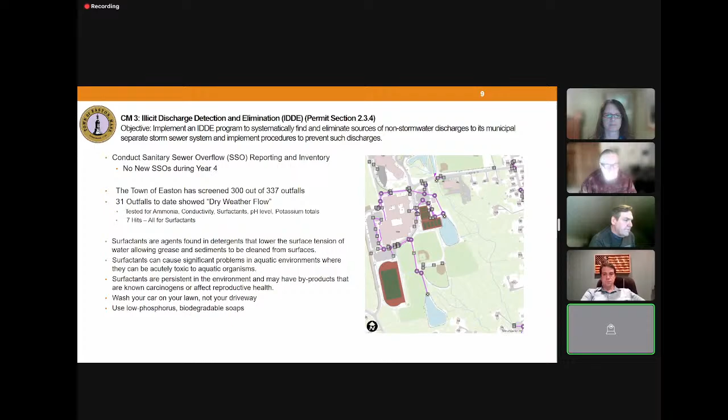In general, what have we done in the past year? In addition to everything I just talked about, we send out all the public information, updated our bylaws per the requirement, sweep all our streets twice a year, and inspect as many catch basins as we can to remove sediment. This year we inspected 679 catch basins and removed over 70 cubic yards of material, dirt, grit, anything contaminated, which we've removed and stored. When we have enough material, we'll properly dispose of it.

These last five items are really a testament to Jen and how hard she works here. She and her staff have reviewed 71 site plans, completed 404 site inspections, issued 13 enforceable actions, received 52 as-builts, and she's reviewed 5 SWPPPs—which if it sounds impressive, it is. That's a lot of work, and I don't know if she gets the credit she deserves for everything that she does.

So, Jen, if you want to take a victory lap on that one. That was very nice, thank you.

At the end of this year and next year, we will continue distributing educational messages to our targeted audiences. We need to issue one more message to industrial and commercial business owners. Unfortunately, because of COVID, my ability to get out and talk to people had to be delayed. I want to get in front of a couple of sites in town, and I'm working with Stephanie to go to some of her meetings and give a presentation about what business owners can do if they own a commercial or industrial site. Simple things like making sure dumpsters are closed before a rainstorm, no trash in the catch basins, and making sure landscapers aren't dumping debris in drainage swales. Little things like this really add up over time.

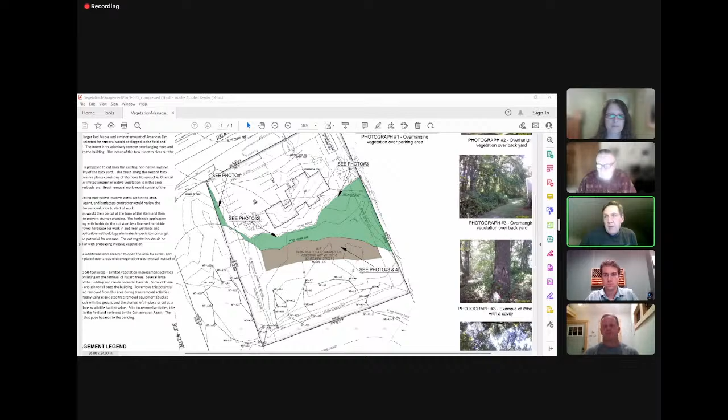Okay, so seeing none, we'll continue to the 21st. Is that correct? Yes.

You agreeable to that, Brad? Yes, for sure. Okay, make a motion to continue 95 Belmont Street to November 21st. Carol, second. Roll call vote.

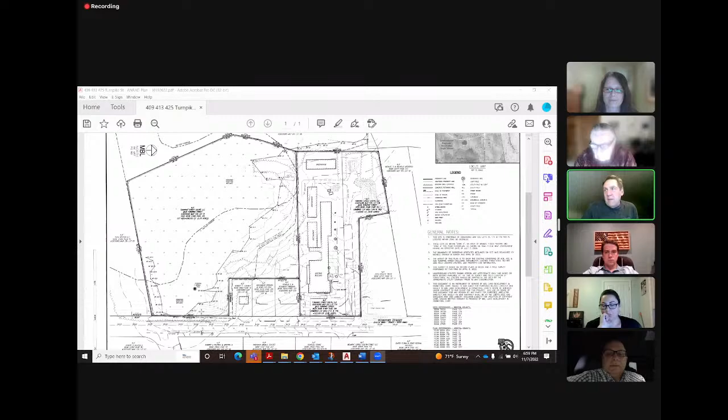Any public comment for 413, 415, and 409, 413, and 425 Turnpike?

Okay, so seeing none, we will continue to November 21st. Sounds good. Okay, so I'll make a motion to continue 409, 413, 425 Turnpike to November 21st.

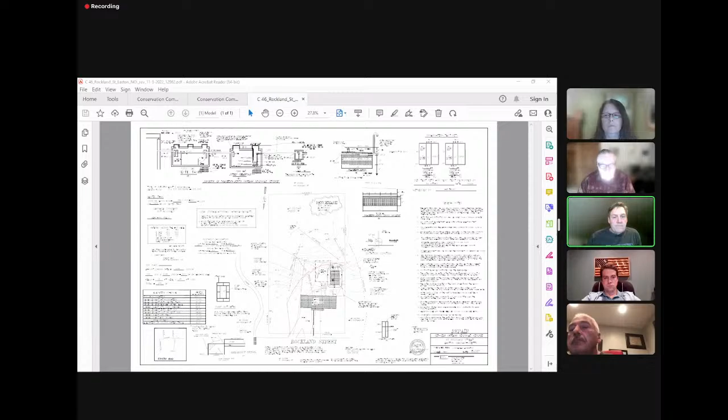Okay, we should have them. We can see them on the screen, yeah. Okay, can you see them now? Does that help, Jennifer? Yes. Could tell by the squinting. I have 3 pairs of glasses, these are only for the UV light, the blue light, they're not for distance or reading. Okay, there you go, Bill.

There's your plan, okay, so there it is. The septic system is pretty much in the only area it can fit on the property. I tried to maximize the distance from all the wetland type stuff there.

When I submitted, the flagging, I think Jennifer looked at it, but the flagging was done by someone else, I don't know who it was. The homeowner at the time was looking to sell his property, but the flags are all up, and so I just located them. I had a little mess-up on a couple of the locations, but this plan fixes them from the first submission that Jennifer had.

I added the stream, the required setbacks. She said something about a potential vernal pool, so I added where that was and showed all the setbacks. That's just about 100 feet from the leaching area. The leaching area is about 55 feet from the closest vegetated wetland. I added the 100 foot off the stream. The leaching area falls about right in the middle between the 100 and 200, it's about 150 feet away from the stream. So any other questions or comments? Glad to address them.

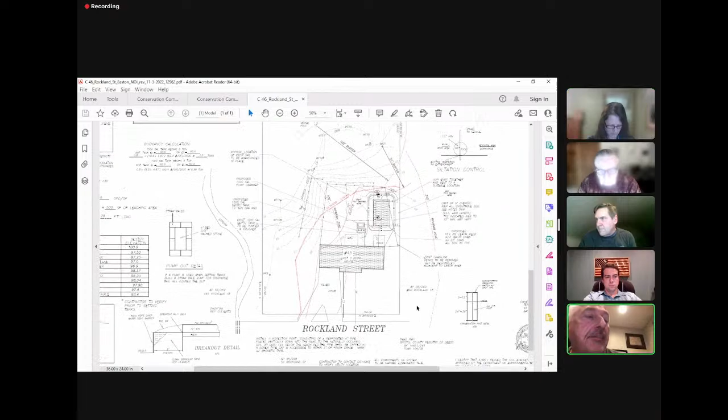Okay, and what about the other missing information that's listed in the staff report? I believe I uploaded everything. You had asked for a couple of things, what was up in your report? A couple of other things, and I believe I uploaded everything.

The supplemental form isn't identifying all the resource areas on the property. There's something on the supplemental form that says you're exempt under the bylaw, but this isn't exempt under anything. Use the correct form and resubmit the revision, please. Then a written description of how the project meets the performance standards, the FIRM, and the natural heritage maps.

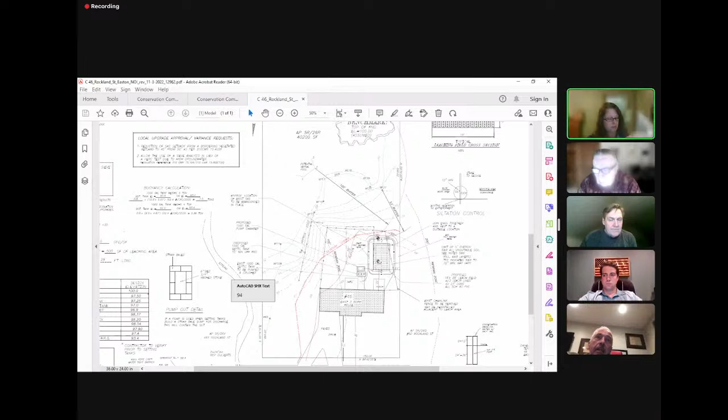I know, some of those things, quite a list, so without, and it was done in September. If you're telling me that everything has been submitted, okay, I'll have to look it up, though, I won't be able to do that right now. I understand, I just wanted to kind of get it rolling. If there was anything else you needed, I can address it and have everything together from the plan, at least for the next meeting, and I'll make sure you have all that information you asked for.

Yeah, okay, so typically someone will either send an email telling me how they addressed all the comments in the staff report, or they'll provide a letter that makes it go a little easier.

Just for the record, the only thing uploaded to PermitEyes is this plan. There's no additional sheets or anything, so just to clarify. Okay, I'll look into that because I know I did the FIRM map.

If you have concerns about what Jennifer is requesting, I suggest you reach out to her and make sure. Yep, no, I understand. The only way we can move forward on this is if we get everything we've got to get to.

So in addition to uploading, do you want hard copies of everything also? Just the one hard copy is great. Thank you. One hard copy, okay. Fair enough.

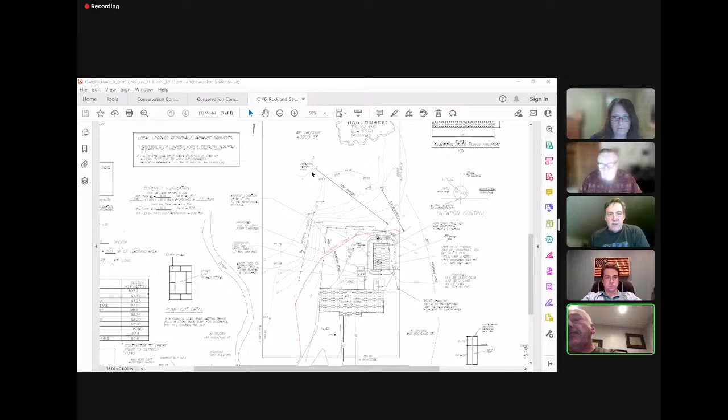I just want to clarify what that 100-foot is. In Easton, under the local bylaw, there's a 100-foot boundary to the vernal pool and then another 100-foot buffer zone to the vernal pool. Oh, okay. So maybe actually it's 200 feet from the mean high water. Oh, okay, so I would need okay.

Let me get all this together and I will get a hold of Jennifer in sufficient time before the next meeting and make sure I have everything that she needs. Yeah, you definitely want to get everything to her by next Monday, the 14th. But she needs several days to not just review your project, but all the other projects that are getting continued to November 21st. I understand.

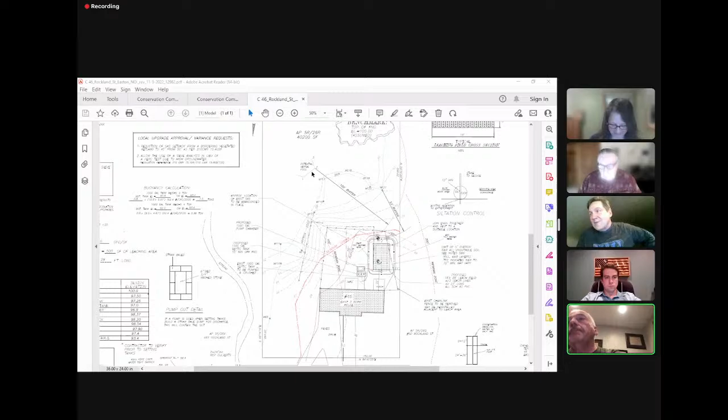Okay, any public comment? 46 Rockland. I will stop sharing my screen.

If I could think about it here. Is the screen share done now, right? No, I took the plan off. Thank you, you're good. Seeing...

No public comment, we'll make a motion to continue to the 21st, November 21st. Just if you aren't going to make getting everything to Jennifer by next Monday, it could be a little bit of a stretch for you. Let's push it out before we get to the hearing. Okay, yep, okay, I'll be able to take care of it.

Okay, so make a motion to continue 46 Rockland to November 21st. Benson, second. Roll call vote. Benson, aye. Carol, aye. Caulfield's, aye. Okay, thank you, Mr. Kelly.

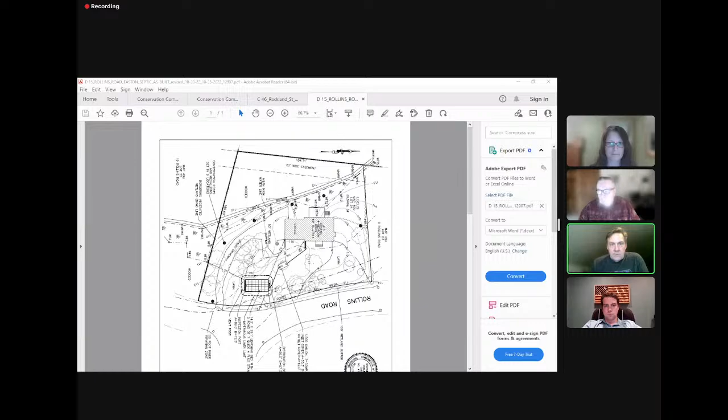Any public comment on 15 Rollins Road? Seeing none, make a motion to issue a certificate of compliance for 15 Rollins Road. Carol, second. Roll call vote. Benson, aye. Carol, aye. Caulfield's aye.

Next up is 59 Meeting House Lane. This is another certificate of compliance for a single family home and driveway. This was previously continued as well.

Scott's here, he's raised his hand too. Okay, Scott. All right, there we go. Thanks, Scott. Thank you, Mr. Chairman. Good evening, Mr. Chairman, Commission members. Scott Farrier from Holmgren Engineering.

Representing Chris and Kelly Percio, who are the owners of 59 Meeting House Lane. We have for you tonight a request for a certificate of compliance. Their property at 59 Meeting House has kind of a long history going back probably 6 or 7 years through the commission.

The previous owner had enforcement orders issued against him, along with LEC. My company did quite a lot of work and finally got permits issued through you folks to the original owners. They started the work on the site, a lot of restoration, enhancement plans, a lot of removing of fill that was placed illegally on the site. So a whole bunch of work had taken place, and construction on the approved home site had started when my clients bought the property back in 2020.

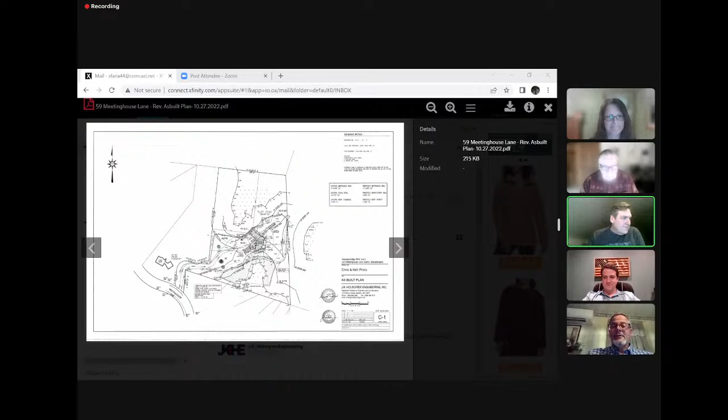Folks, I'm gonna attempt to share my screen, which I never have that much luck doing for some reason. Just let me know if you see it. Are you seeing that plan? No, gotta hit the green share button at the bottom first. We've only been doing this for 2 years now. Oh my God, there we go. All right, share screen. Any luck there, folks? No. Scott, did you have the document open before you went? I did. Oh, okay, usually that's the thing, but there you go. All right, it needed a double click. All right, let me just see if I can zoom up a little bit on that.

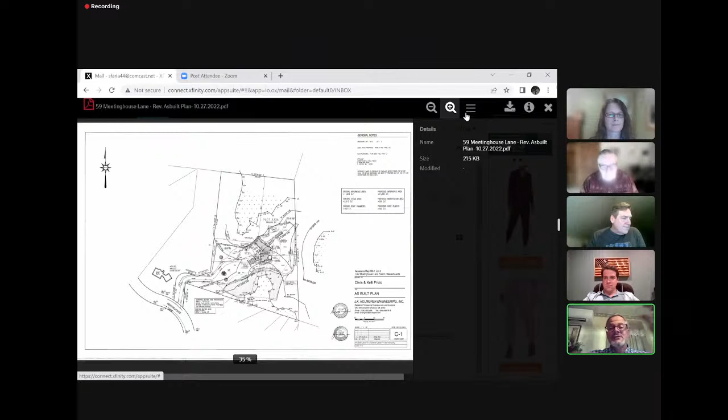So that is the request, the plan to accompany the request for certificate of compliance. So as I said, it's a really big lot off of Meeting House. They have a long paved driveway leading up to the house, lawn area in the front, lawn area in the back. There's this area in through here is the wetland replication area, and then associated with that was buffer zone enhancement area that was approved and has been built. A large wildflower area on the top side of the driveway.

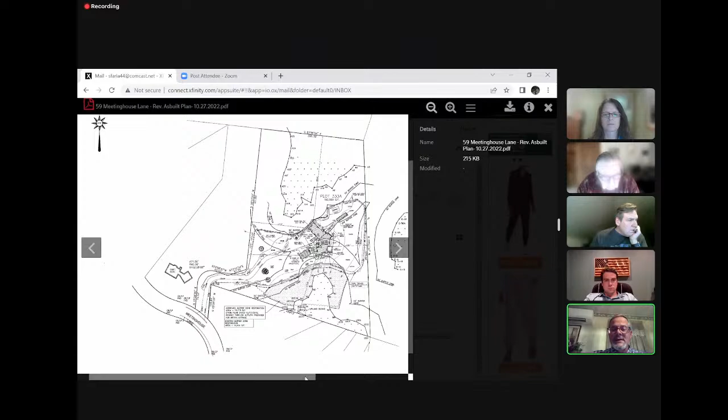One significant change that took place, folks, that wasn't permitted, like we've done on a lot of these jobs - we had a bioretention area proposed at the corner of the driveway that I'm gonna try to zoom up for you. Well, I'm gonna zoom back down so I don't lose it. We had a large bioretention area proposed at the driveway. They were concerned with safety issues on that.

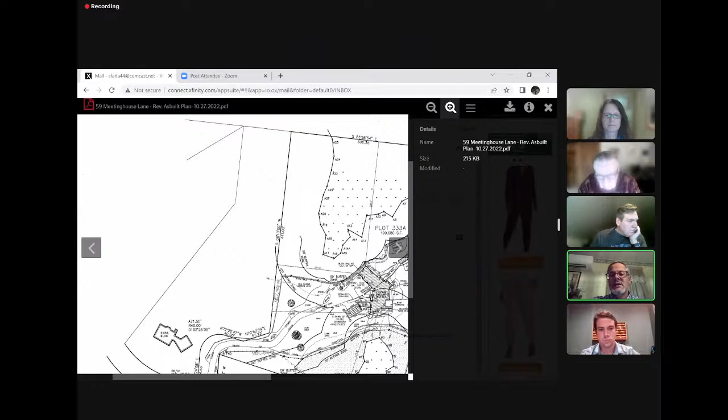And because of that, they decided to install a rather large crushed stone area in place of the bioretention area. So right here is the corner of the driveway. This little corner here is where we had a bioretention area proposed. In place of that, they installed a large crushed stone area that they felt was safer, obviously, for any vehicles in the area, and they felt like that was such a larger area that the commission would have no problem with that. So we do have that change made that was shown on this as-built plan that was not part of the approval. So we have that large stone area. This area just above that stone area is the wildflower meadow area. The wetland markers are up. As I said, it's really a beautiful piece of property.

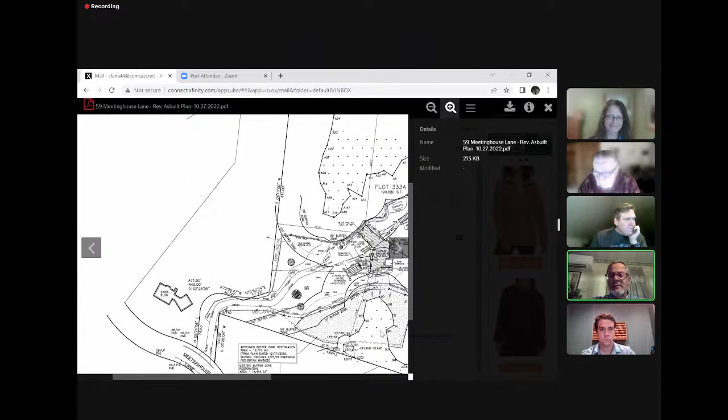Be happy to answer any questions. I believe the Percios are with us on the meeting as well. If you have any questions for them in particular, I'm sure they'd be happy to fill you folks in on exactly what they've done.

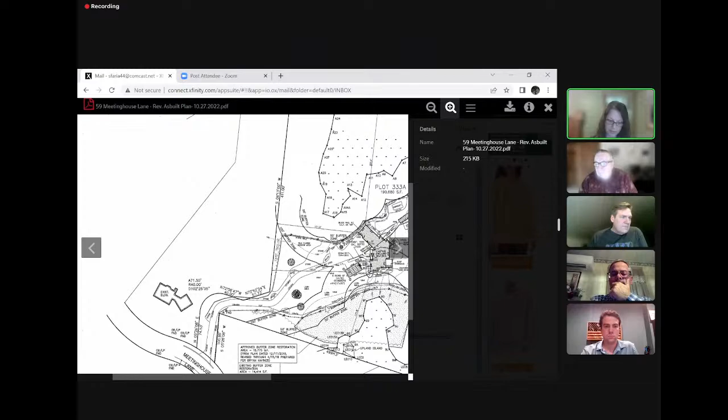Initially, I did have a lot of comments in the staff report about the project. As Scott mentioned, a number of things were not done according to the plan, but they've provided documentation that shows it's pretty equivalent, what was done compared to what was supposed to have been done. There's some additional buffer zone that was converted to lawn, but they also offset with the wildflower garden. Everything is stabilized, the wetland restoration is also complete, and you have the deed restriction. So they could get the certificate of compliance at this point. The substantially in compliance term comes into play here.

From my perspective, just as a comment, only because this history on this site was a little bit sensitive, I think some of these potential changes probably should have had a phone call to Jennifer to make sure they were really going to meet muster here, because I think we've stretched it a little bit on this. I think Jennifer is probably being a little bit generous in saying that it's mostly offset. If we actually did the numbers, it's not as much, but I think it's close. Given that the Percios came to us when they initially made changes to the plan originally issued to the prior owner, that was a good way to go about it. I think these other changes probably could have gone in as minor changes, but we would have been better to involve us up front rather than later on in the project.

So at the COC standpoint here, I'm glad that everything's stabilized at this point, and we're well on our way to wetland replication and buffer zone enhancement. So, any questions from the commission?

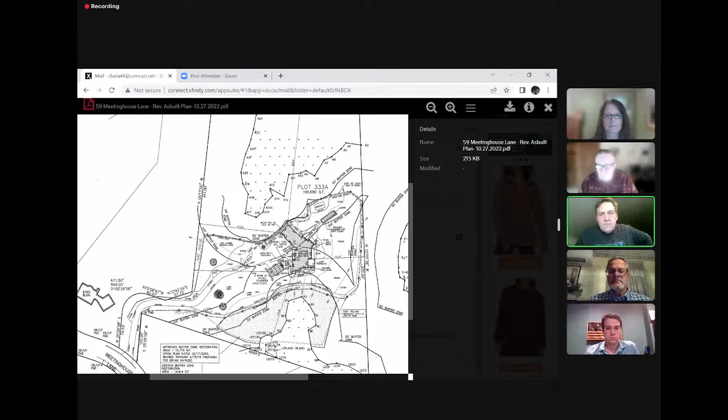Okay, so Chris Percio, one of the homeowners, has his hand up, so I'll recognize him. Although I don't know what he could say at this point. Mr. Percio?

Hey, sorry about that. I just had my hand up perpetually in case you guys had questions, and I thought I needed to have my hand up to answer them. No, I've got nothing to add. I think you guys got it right. I just thank the commission, you guys have given us sound counsel. It's been a long and winding road, a long 2.5, almost 3 years since we bought that property. We knew we were buying something that was distressed, and so I'm very grateful for all the guidance that you guys gave, and Andrea in particular, she gave quite a bit along the way. She handheld us through a lot of the beginnings of this. So appreciative, that's it, thank you. You guys can kick me out.

Any other public comment for 59 Meetinghouse Lane? Seeing none, no further questions from the commission, we'll take a vote here.

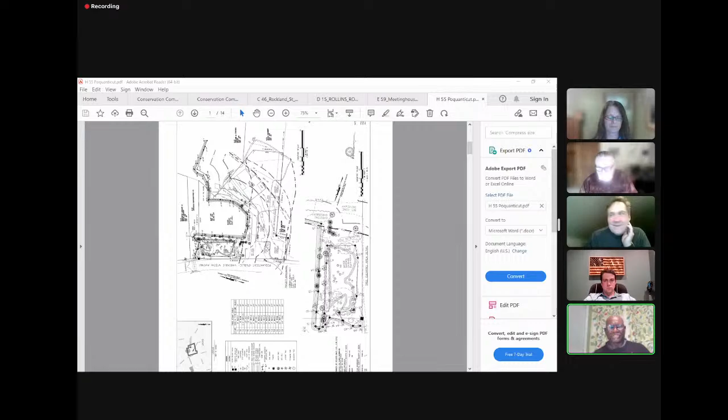So if I'm able to share my file - I'll probably show my ignorance pretty quick. What do I do? It says share screen, have a green button in the middle of the bottom. What am I supposed to do? Just find the window that you have that document open in. You have to have it open on your computer already. Is that showing? No. Okay, I'll try again. I'll highlight this one here, and then I'll say share. Is that working? We see your home computer now. I will take pity on your COVID brain - gallery view, hide non-video participants. No, I'll share it from here. Like I said, I'll probably be displaying my ignorance. There we go, thank you.

So what you have is the existing pond. Rory, if you can zoom in a little bit on what I will call the - so you can see the actual house. A good portion of the property is actually the pond, as well as the dam.

So where it says - so this is the right, so you see the word dam, right? It almost looks like a peninsula right there. That is the actual dam, and it's built out of stones. So a lot of these dams that are constructed of stone tend to have tree roots getting to them.

Obviously, if he was going to manage the trees, he needed to ask for a permit. I checked with him - I guess this is his first encounter with Concom, so he does not appear to be a repeat offender, if you will. I know I had a client that was a perpetual offender. So I specifically asked Mr. Newberger if he has had any run-in with Concom, and it does not appear to be so.

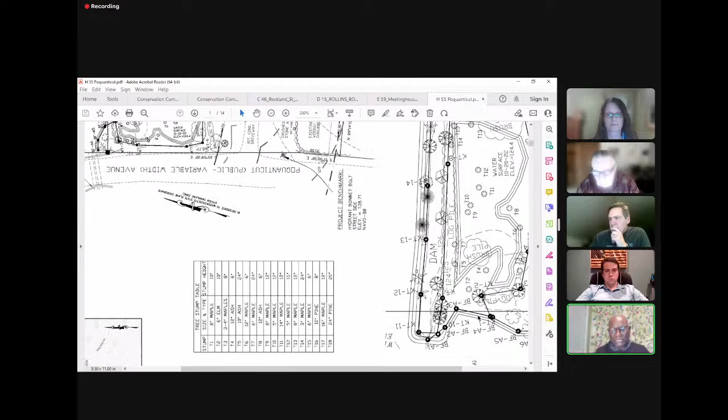That's basically Mr. Newberger - he's not claiming that he has the authority to do that. He just was ignorant of what the involvement of the commission would be. He was thinking that he was maintaining the dam, and now he knows. He had actually expressed concern for a few other trees that were undermining the dam, and I told him no, you got to get through the enforcement action first. We cannot start asking for tree management without addressing the enforcement issue.

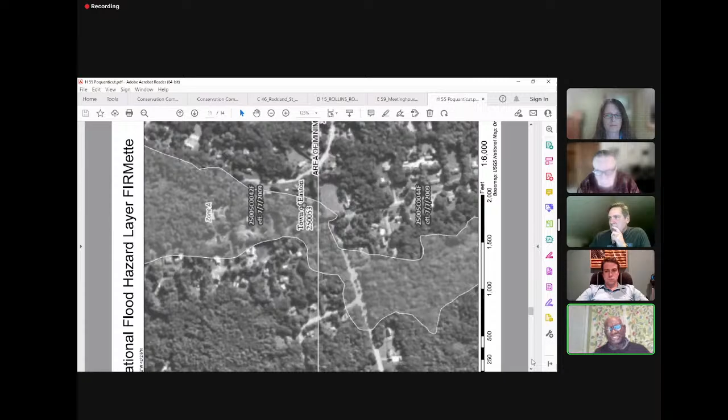I will suggest to the commission, obviously not in the last 5 years or so, but I and my firm was responsible for dam safety inspections for the town of Easton for upwards of 10, 12 years. And that included Long Pond, New Pond, Ames Pond Dam, Landwater Dam, and the one that's right off of Main Street.

If you look historically at those that were constructed of stone, which was primarily the old dam, the New Pond Dam, and Ames Pond, most of my recommendations was always that we don't want to pull the tree stumps because it will collapse the dams. But we also recommended managing those trees so that the root system does not undermine the dam. So that is something we would like to come back in the future to address.

We're hoping that, whereas Mr. Newberger is, quite frankly, and I understand because I tell people the same thing, ignorance is not an excuse - ignorance of the law is not an excuse - but at the end of the day, this is a pure case of ignorance. He is willing to work with the commission, at least do the restoration work, and then hopefully have a path forward. So with that, I'm pretty much done.

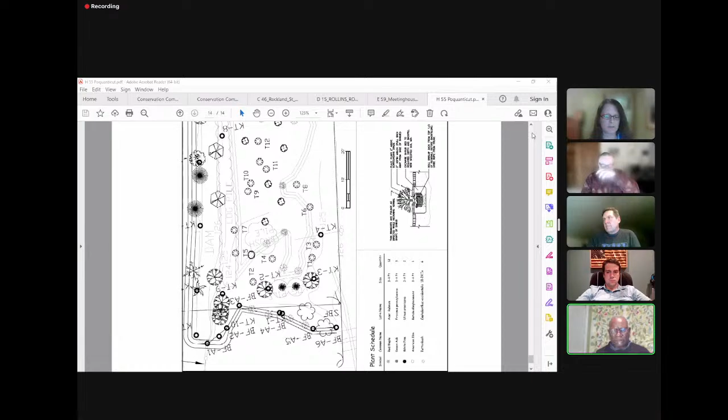The restoration plan doesn't talk about removing any of the log piles or the brush piles, and that should really be part of the restoration plan itself. So we would add those things, and once the commission agrees to the type of restoration, we would just need to amend the enforcement order and reissue that. You probably want to put some timeframes on that - a reasonable amount of time to remove the log pile and brush piles, and a reasonable amount of time to plant the planting plan as proposed in the restoration plan.

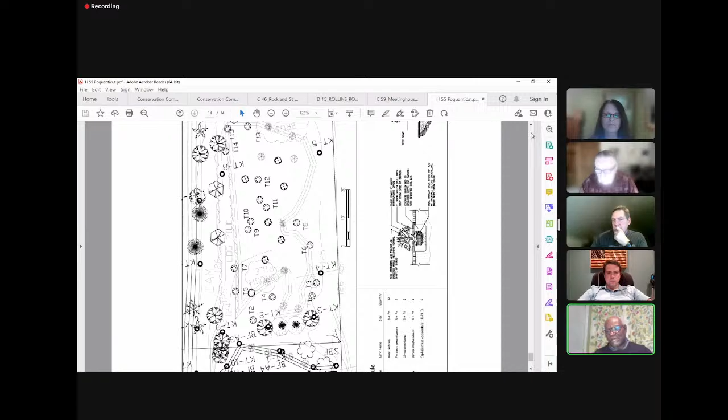Are the plants available already? Yes. Now, the riverfront - I agree with you 100%, but from a practical standpoint we didn't pay too much attention to it because the entire property is in the riverfront. There is no part of that property that is not in the riverfront. That's correct, but there's a big difference between the 100-foot riverfront area and the 200-foot riverfront area. So if that would be accurate on the plan, that would be appreciated.

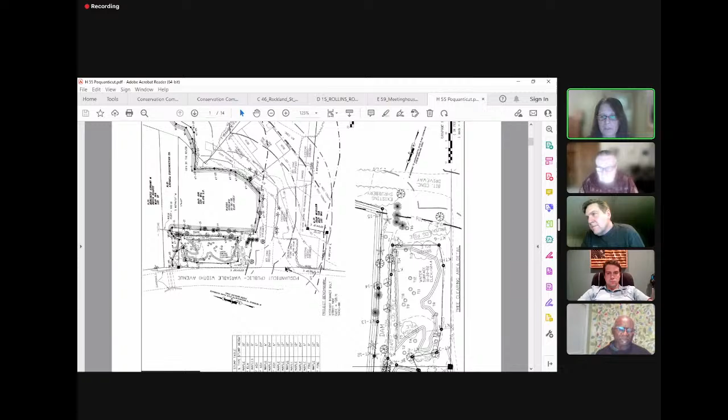So you're saying the plants are already available and ready to be ordered - can the whole restoration plan be completed within a month? It can, but I'm wondering if now that we're getting into a frost of probably freezing temperatures, we can plan that for this November, and then hopefully you will look at it during the spring growing season and see how successful those are.

The reason we have those plants available is that Mr. Thompson does have a nursery where he uses those temporary kind of buildings - not an actual physical structure - with lightings in them. So he does harvest, and he does grow and harvest some of these plants as part of his repertoire of work.

Any questions from the commission?

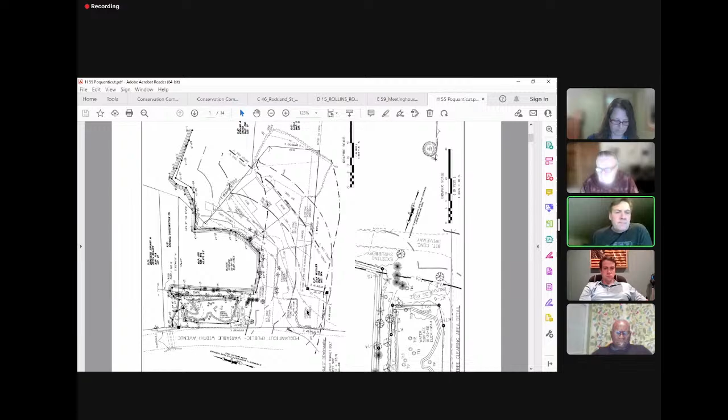Jennifer, can you give us some guidance on how late we can do these plantings and expect success? It was 70 degrees last weekend. So if you get the plants in the ground very soon, they should be fine, and the first growing season to check them would be in the spring.

I think the timeline we want to set on this is as soon as possible. And I think, as Jennifer has expressed in the restoration plan, we've got to remove the logs and brush pile that's there in the wetlands so we can expect success for what's going on.

Any questions or concerns from the commission? There probably should be some discussion here on a surety bond related to this as well. I think with projects like this, the enforcement orders we've done in the last year or two, we've issued surety bonds to make sure the project gets done in the timeframe we want. We've had too many that have dragged out or not gotten done at all.